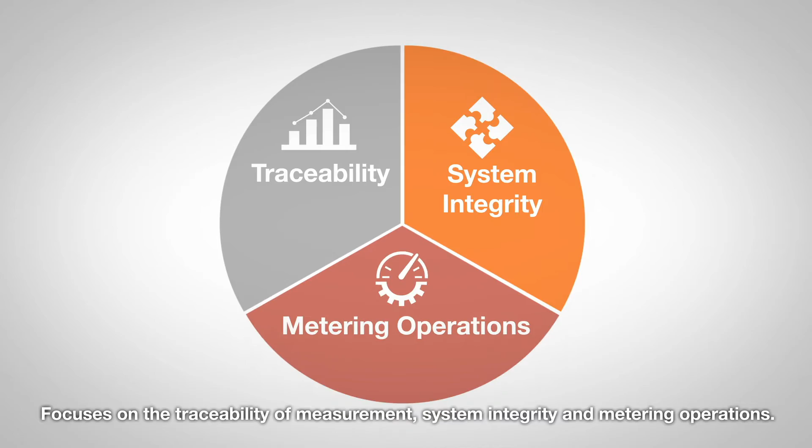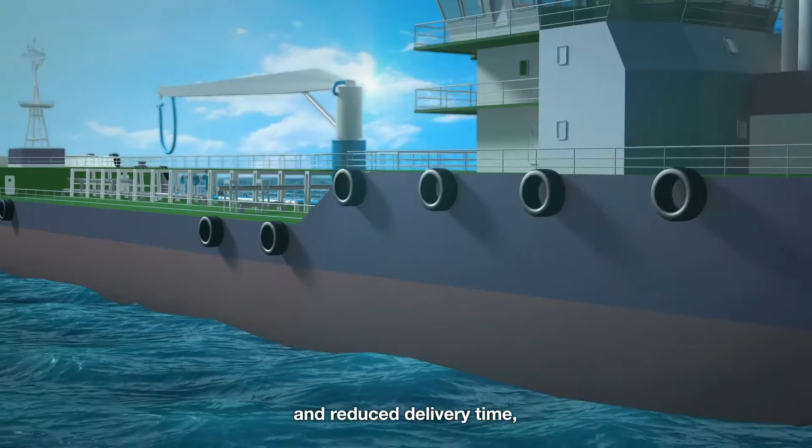The governing standards for custody transfer using the mass flow metering system focuses on the traceability of measurement, system integrity, and metering operations. The mass flow meter brings to ship owners and operators cost efficiency and reduced delivery time while enhancing the integrity, transparency, and efficiency of fuel supply.

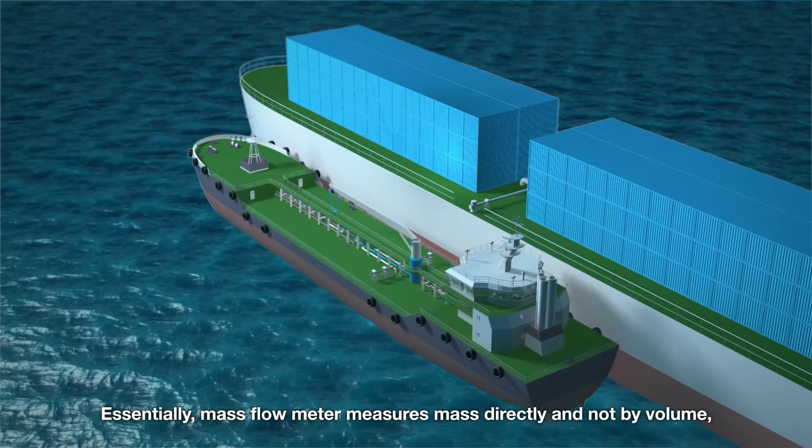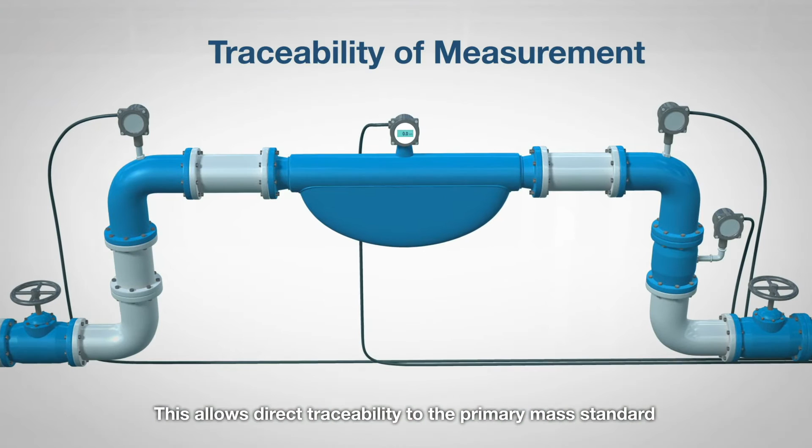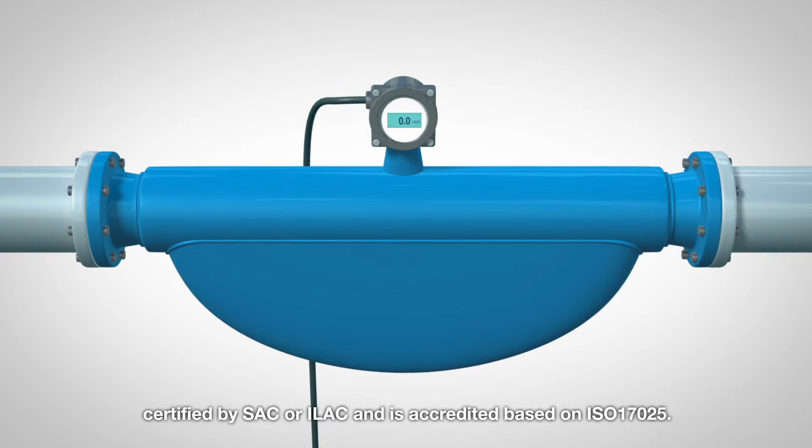Essentially, mass flow meter measures mass directly and not by volume, which is in line with the bunker industry standard practice of fuel supply. This allows direct traceability to the primary mass standard before being used in custody transfer. The mass flow meter is calibrated in an approved laboratory certified by SAC or ILAC and is accredited based on ISO 17025.

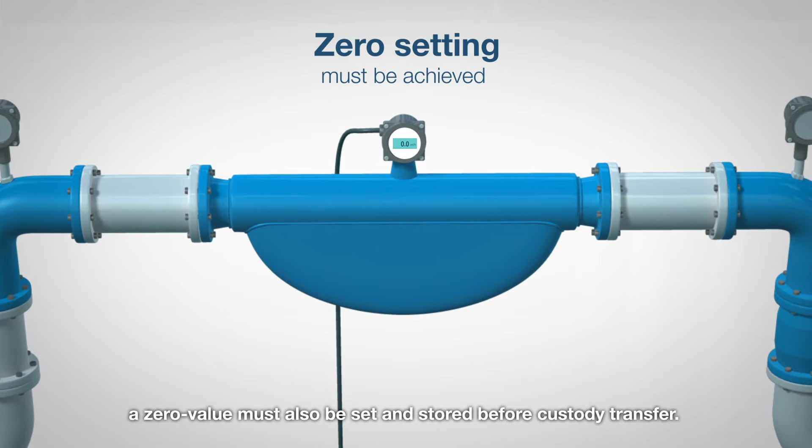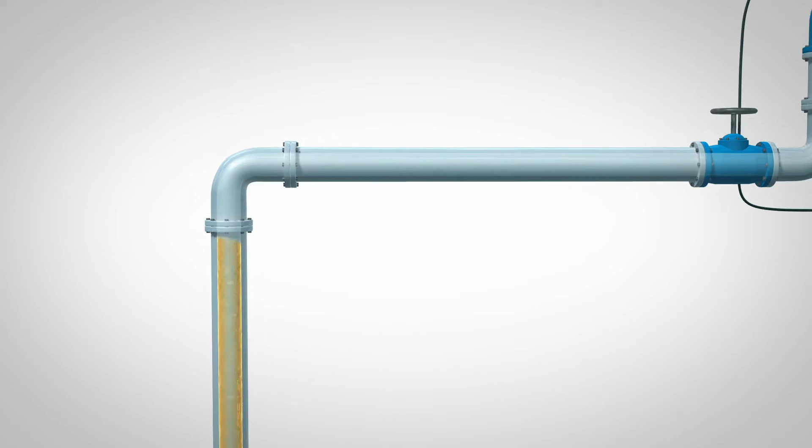For the most accurate measurements, a zero value must also be set and stored before custody transfer. To fulfill the proper zero setting requirement, the mass flow meter tubes have to be fully packed with the fluid. To ensure that the zero value baseline has not drifted out of the acceptable range in the governing standards, zero verification is required periodically.

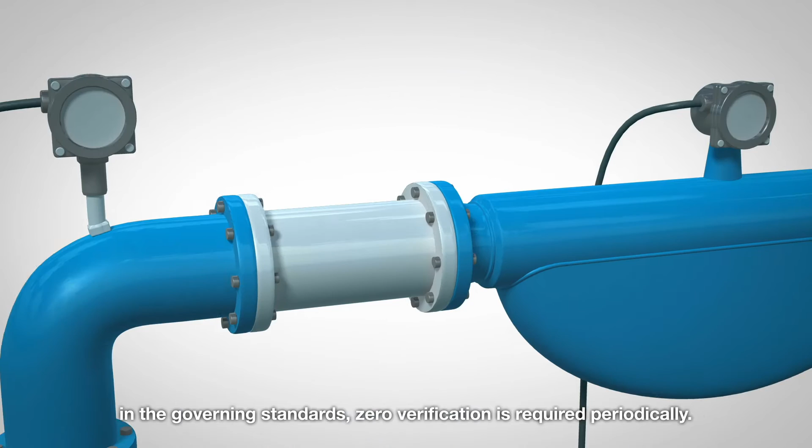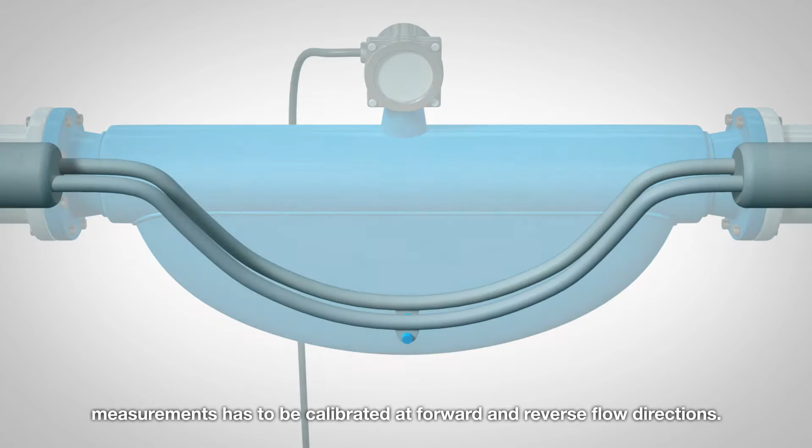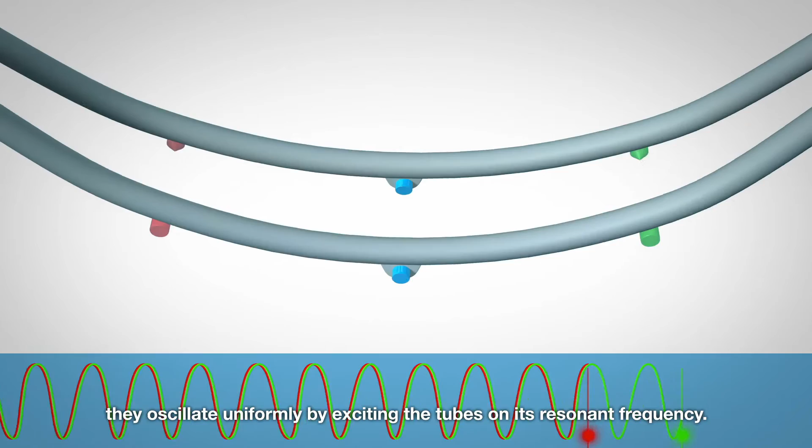In accordance to the standards, mass flow meter used for bidirectional measurements has to be calibrated at forward and reverse flow directions. When there's no fluid flowing through the tubes, they oscillate uniformly by exciting the tubes on its resonant frequency. However, when fluid flows through the tubes, there will be additional twisting and turnings imposed on the oscillation, known as the Coriolis Effect.

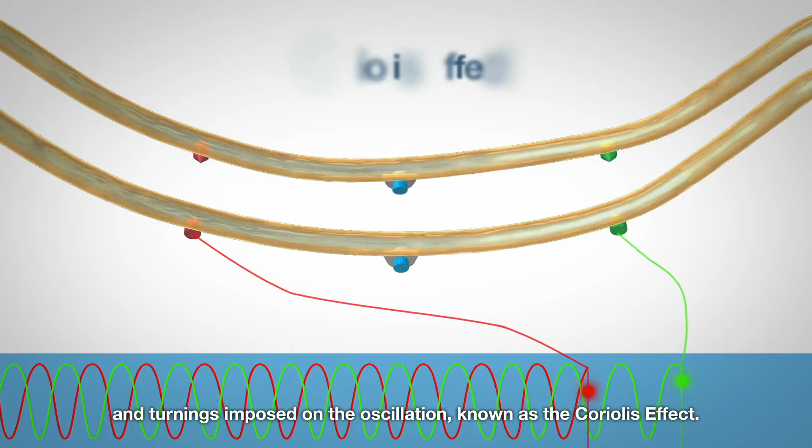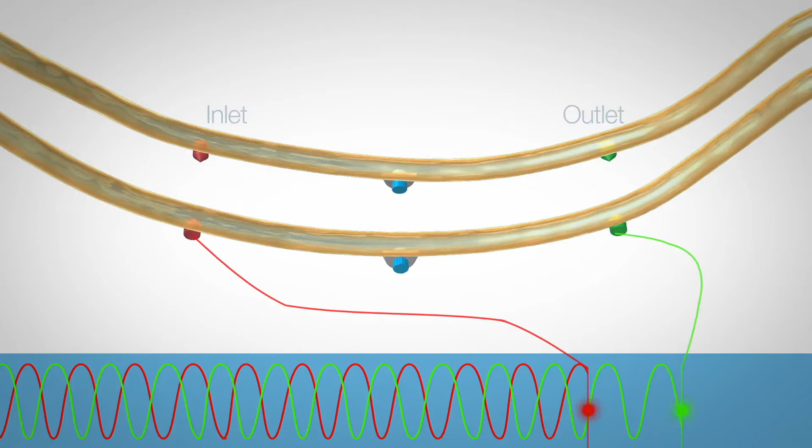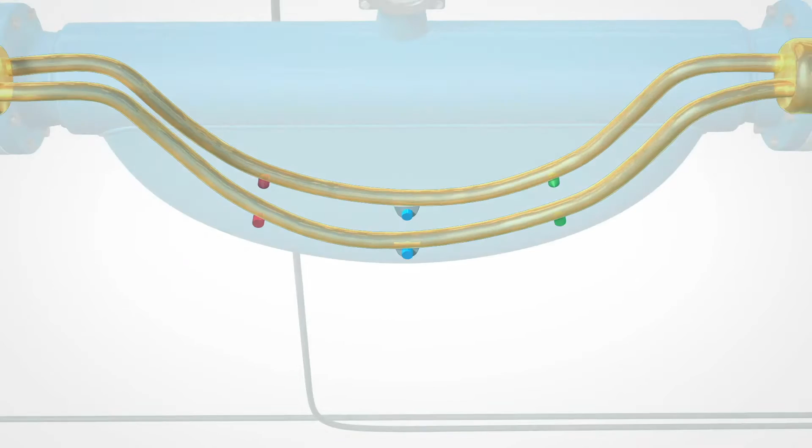Measurement is calculated by the sensors located at the inlet and outlet to detect the electrical signals. Fluid flowing through the tube will bring about a phase shift that is the key to determine the mass flow rate. The measurement will happen for both loading and delivery, thus reducing the uncertainty.

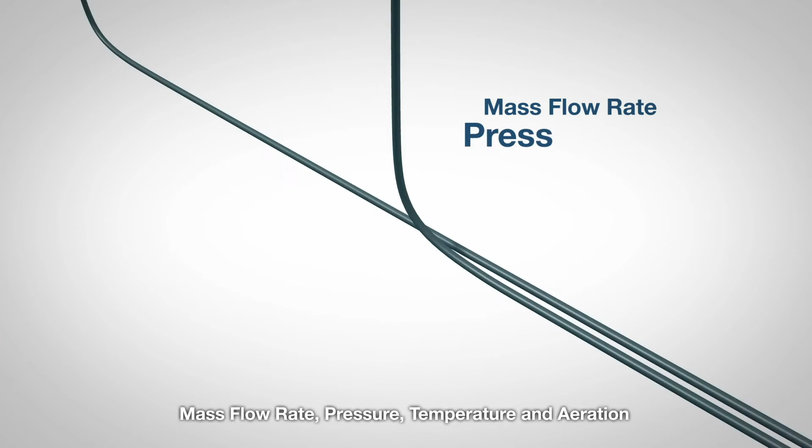Flow parameters such as mass flow rate, pressure, temperature, and aeration will be measured and be sent to the monitor. These data will then be stored and be traceable in a data logger for at least 3 months for data security.

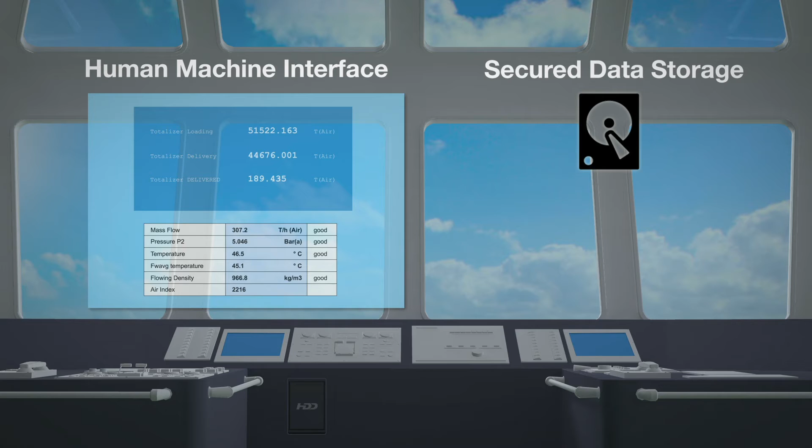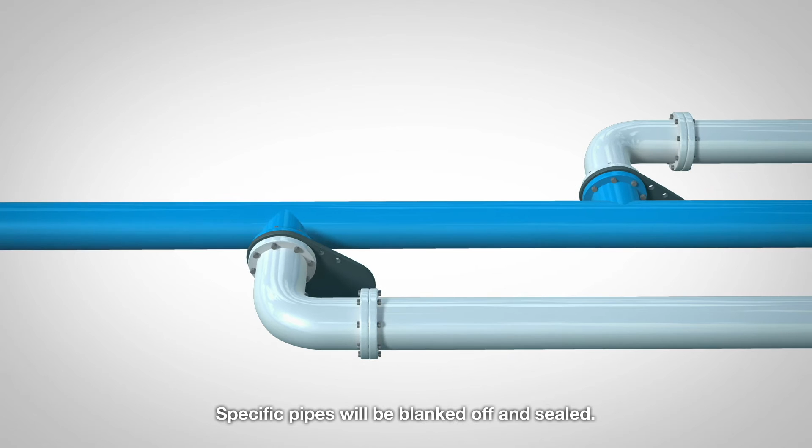To ensure that all fuel measured by the mass flow meter is delivered to the receiving vessel, specific pipes will be blanked off and sealed. This will disallow any fuel to flow to other pipes or back to the fuel tank, ensuring system integrity.

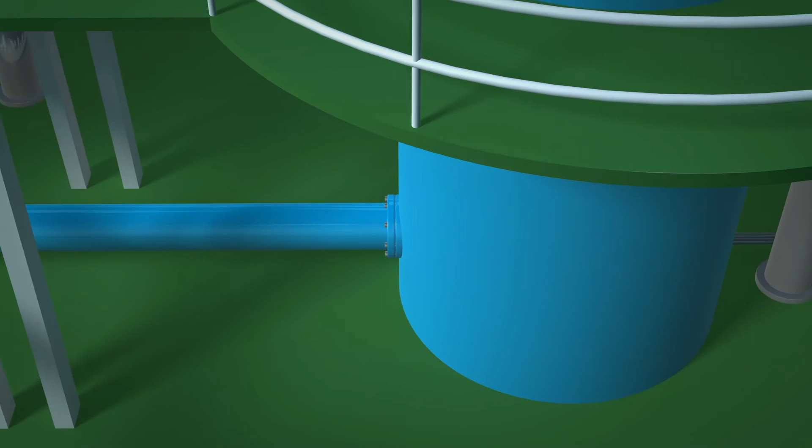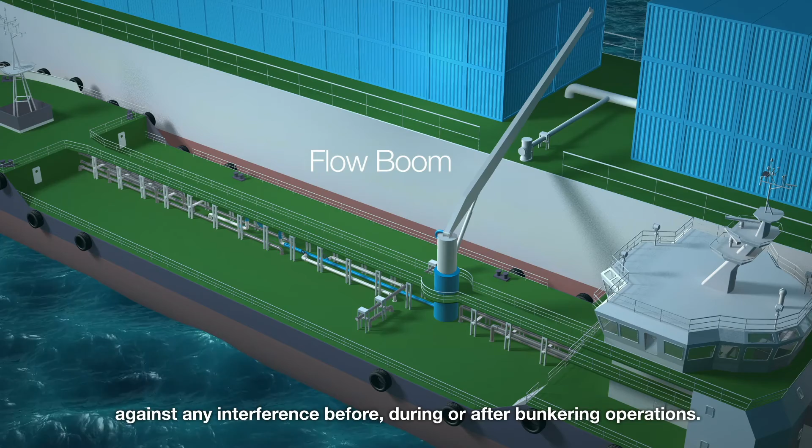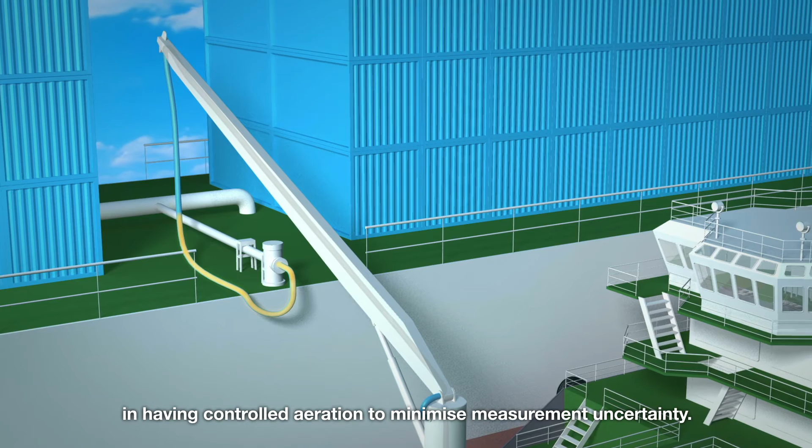Enhancing metering system and pipeline security, the mass flow meter system's measurement is secured against any interference before, during, or after bunkering operations. Proper metering operations throughout the bunkering process will guide in having controlled aeration to minimize measurement uncertainty. Under metering procedures, documentation for pre-delivery, delivery, and post-delivery have to be complied with.

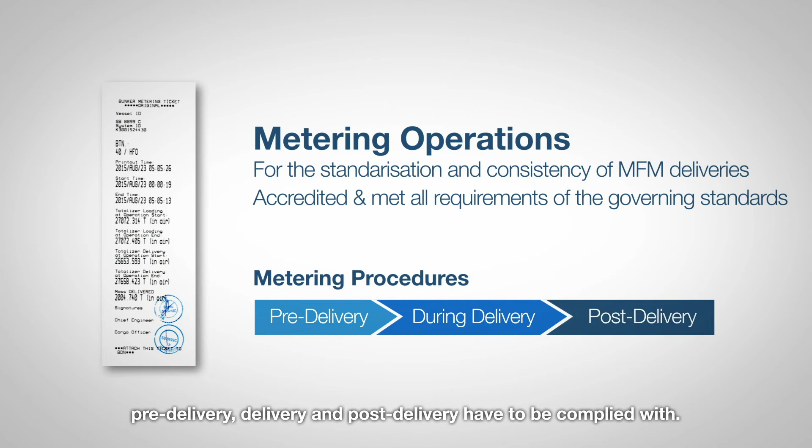The governing standards are intended to enhance efficiency and promote best practices with the use of the mass flow meter systems.